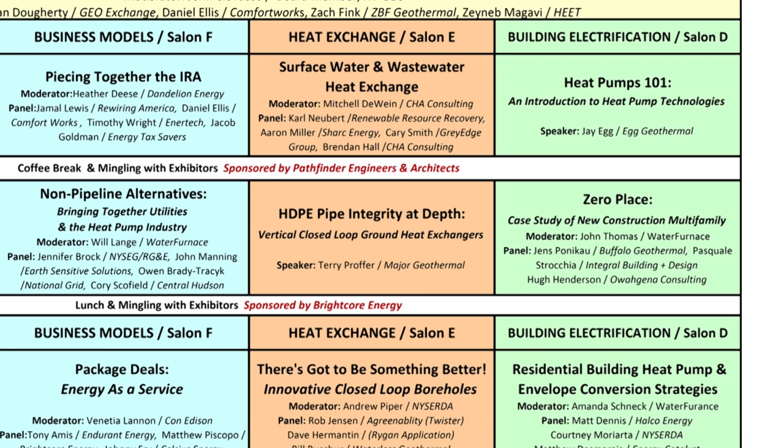So I would like to bring up Donovan Gordon and have him give us some introductory remarks for the day.

So Donovan, when did you start? 2015. Wow, and he had almost no gray, and I had a full head of hair at the time. Well, I still do, I guess.

When Donovan came to the organization, he was with NY-GEO, in the halls trying to advocate for geothermal, and then at some point this position opened up at NYSERDA, and he got it. He was the right man at the right time - somebody that really brought a background and an infusion of energy into this industry that we really needed, and he's carried that through. Now there's a lot of activity in the clean heating and cooling space, a lot of it happened under his guidance, and now he's looking at some other aspects he's looking to grow, and he's going to talk about some of those things today. So I'd like to bring up Donovan Gordon.

I didn't cry this time. No crying, I promised. Actually, Bill caught me earlier - allergies, so I've been a little teary-eyed. Yes, I didn't have much gray. Also didn't have any grandchildren when I started. Now I have 6. My goodness.

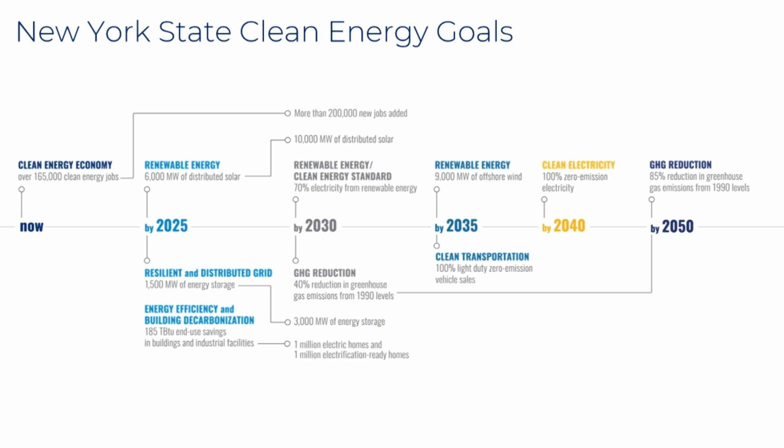Here are the sectors that we really need to address: buildings and transportation. So we're going to focus on the building sector.

Yeah, there's a lot of people from out of town as well, so they're less familiar with the state's goals too. Good, okay, yeah, that's why I figured I'd do that.

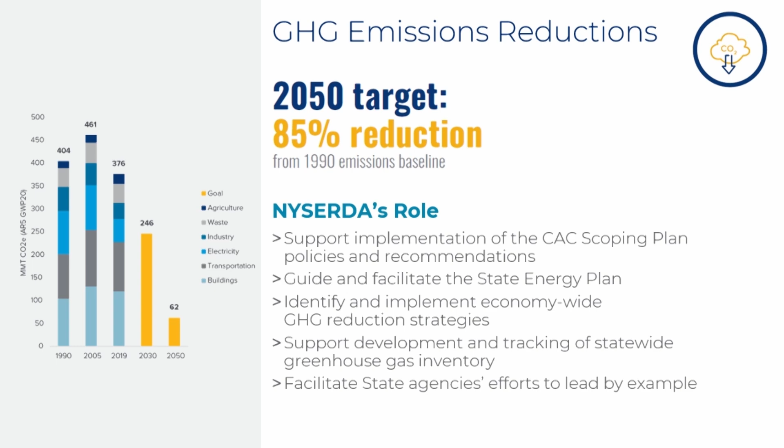While we put in heat pumps and do thermal energy networks, which is really infrastructure - my focus now is really on infrastructure, putting these network pipes in the ground - we still need building energy efficiency. So we need to tighten the envelopes. We need advanced codes and standards, and eliminating barriers. We kind of know what the barriers are: the cost, the training, and so on and so forth.

Now to the point I really want to get to: clean thermal energy networks and an update on the PON. Most of us probably know what it is, so I'm not going to spend time here. It's a network of piping loops. It could be a central plant or distributed with an ambient loop. We call it fourth or fifth generation, but it's really centralized or distributed.

We want it connected to on-site renewables, and resiliency is going to be the big thing. The biggest fear we hear from customers is: if power goes out, I'm not going to have heat, so don't take away my gas - because when we had these storms up in Western New York, people were opening their ovens to stay warm. We don't want that. We need to make sure their heat pumps stay on and they stay warm. I think that's our responsibility. If we're selling them this product, let's make sure it's reliable and they can count on it when they really need it.

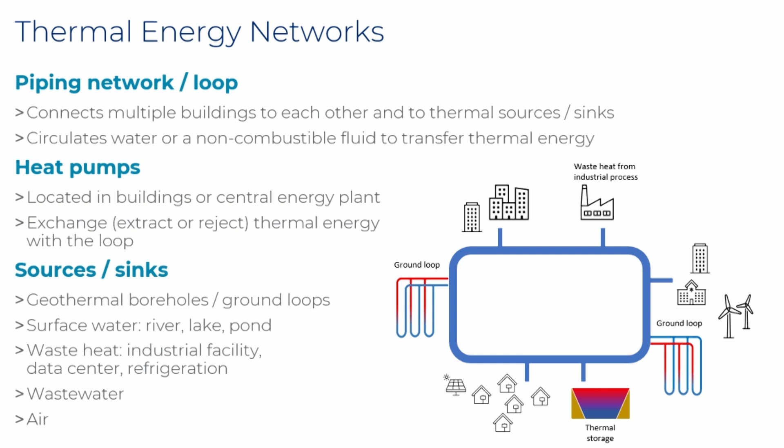They're looking at different sources and sinks, loops - that's what we're here for - ground loops, surface water, lakes, ponds, wastewater, industrial refrigerants, waste heat, heat coming from building to building, and air source. We want to use every available thermal resource to heat and cool and provide hot water to buildings. No heat should escape - let's take it and reuse it. That's all the heat pump does, right? Transfer heat from one place to another. Let's utilize it to the max.

This now is sort of an update on PON 4614. It was launched in February of 2021, and it was a pilot project. We didn't really know what to expect here, and it's performed far beyond our wildest expectations, to the point where we actually had to drop a couple of the categories just to keep the funding to where we can help it advance.

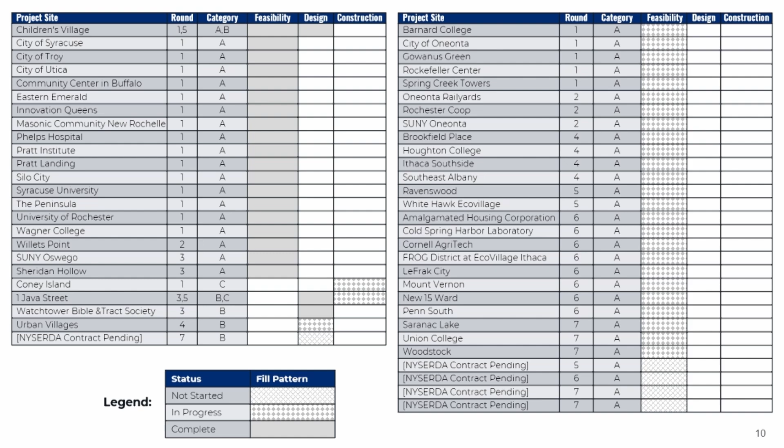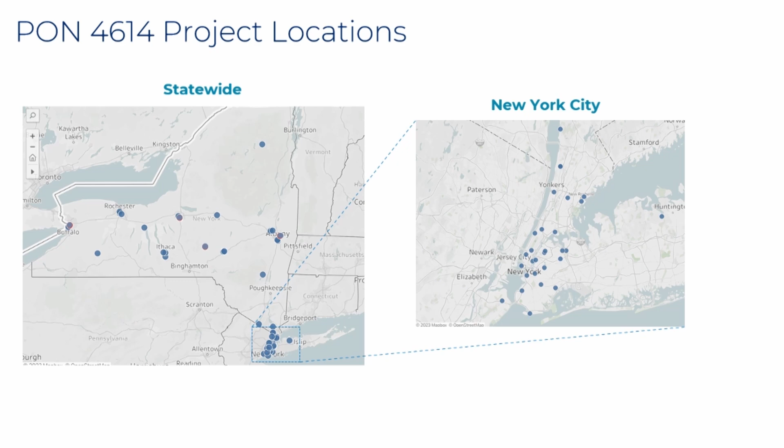So what I'm going to do next is really give you some highlights of some of the projects in there to let you see the diversity, the breadth, and the depth of the projects that have come to us. Now, these aren't NYSERDA projects—these are proposals that were submitted to the PON and reviewed by an independent scoring committee and deemed worthy of funding. So while we say this is a NYSERDA program, this is the industry bringing projects to us to help them scope it out.

So I'll start off with the first one, Mount Vernon. This is a feasibility study that's about to be started, up in Westchester, about 600 plus thousand square feet. I start off with this one because, as I mentioned, we have 53 projects in our queue right now.

This is the only project of the 53 that lists a MWBE as a partner. So we really need to do a lot better in terms of inclusion, making sure we have as broad a representation in this business as possible, not only training and installing, but actually being partners and subcontractors. So congratulations to the team in Mount Vernon.

Spring Creek Towers, halfway through the feasibility study, I believe. This is very, very interesting, I love this one. Spring Creek Towers is, I believe, one of the largest, if not the largest, affordable housing complexes in the country.

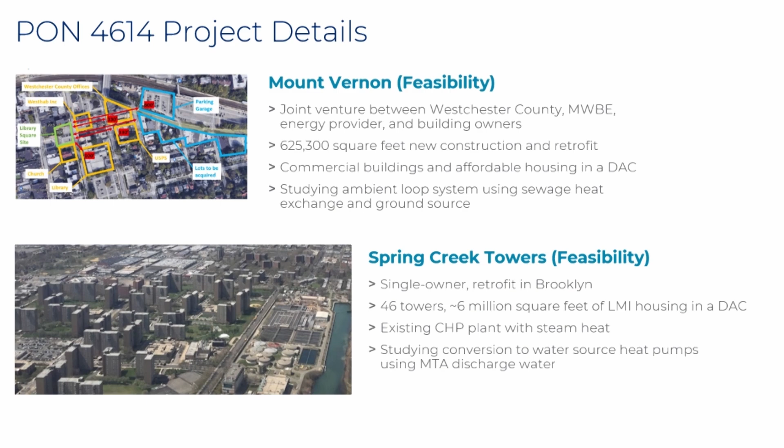So awesome, now I've got to go in turbo drive here. Saranac Lake, what's beautiful about this one? North Country, they want to be municipally owned. But this particular community does not have access to gas, so we're taking them straight to thermal energy networks, which is beautiful. We want to do that.

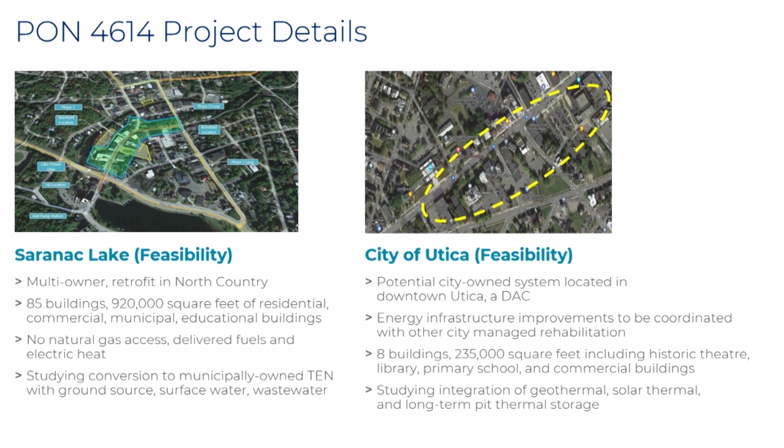City of Utica, their downtown area, a disadvantaged community, another study we're doing where the municipality wants to own the system. So there's a common theme here: we've got a bunch of municipalities really looking at doing thermal energy networks, and I'm encouraging public-private partnerships, like what's happening in Troy with National Grid.

Rochester District Heating Cooperative, this is a steam cooperative. We've got a steam utility that is now looking to convert their steam plant to provide a thermal energy network with geothermal boreholes and wastewater. The Children's Village, they're in the design phase. Actually, they just finished their design, as a matter of fact.

It's a 180-acre site that provides services for children between the ages of 6 and 20 who've gone through the foster home system, to help them become functional citizens. So it really is a rehabilitation, a wonderful cause, and it's a non-for-profit. So we look forward to this, and they're on 100% oil.

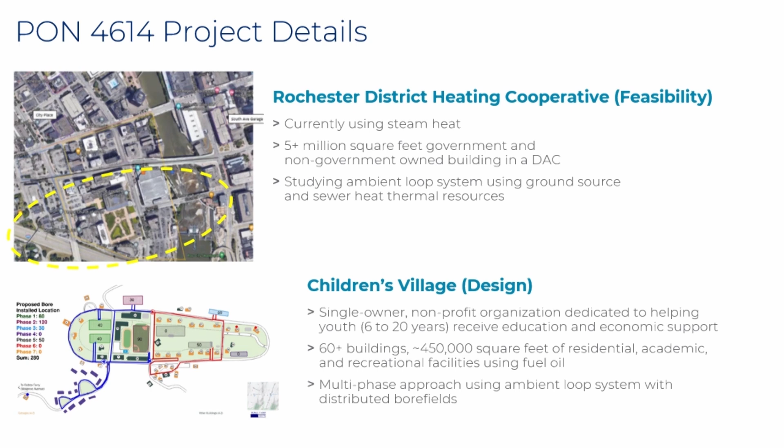This is a community a couple miles away here in Albany. It's 100+ buildings, but this is mostly single family and a few multifamily area. They're looking at boreholes and I think some wastewater too, or part of it, but solar and on-site renewables and storage - this is the whole package they're looking to put together on that one.

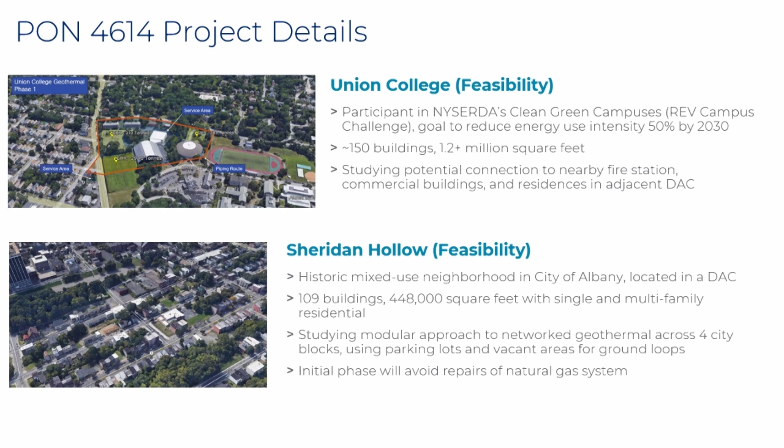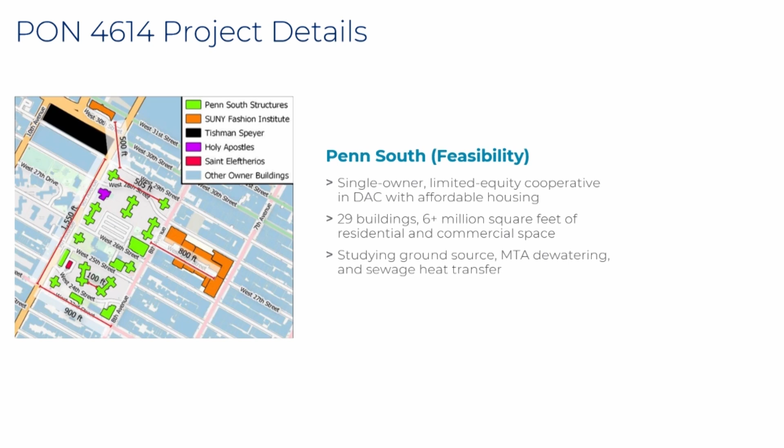And another good one, right in the heart of Manhattan, Penn South. This is in the feasibility stage. Another 6 million square feet plus, and it is in a disadvantaged community and affordable housing. So you can see here, we've got some big projects targeting and impacting affordable housing and disadvantaged communities.

Observations so far? New construction and campuses are the lowest hanging fruits. Yep, as you can see, we got One Java, we've got Coney Island. Yes, they're going to go out first, and as you see the studies we're now doing is small cities and big apartment complexes, the retrofits.

We got to solve the retrofit problem. The other thing is, looking at building envelopes, we got to upgrade the buildings, the electrical upgrades that are needed. So these are all things that need to be factored in, different business models.

Most common sources so far in these studies are geothermal and wastewater. I'm not even getting to the 500-foot stuff - I know they're working on that. And one big thing is we need drillers. I think that's sort of a common theme.

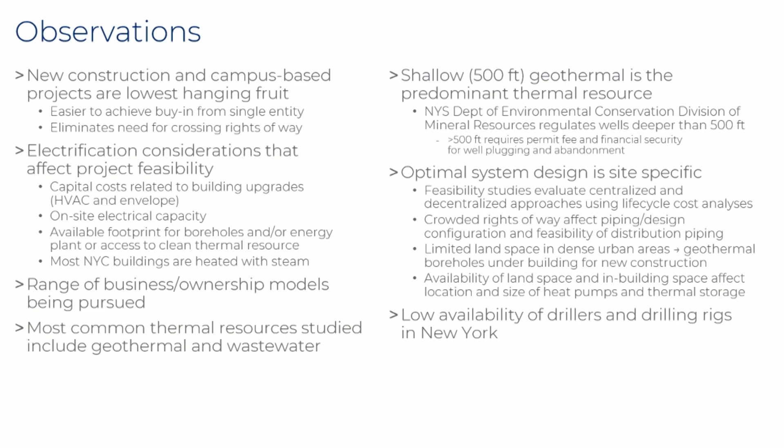Looking ahead. Don't look too far ahead. Don't look too far ahead? No, you're doing good. Okay, all right.

Well, we talked about the scoping plan. Chapter 12, section B6 has a whole section on support development of thermal energy networks. You can read that. Well, I love this one in chapter 18 that no one really talks about, gas system transition. And we lifted this directly from the scoping plan: one scenario that should be considered is seeking to move whole streets and neighborhoods at a time from gas infrastructure to a community-based thermal energy network that supports heat pumps.

Love it. And as we talked about, the Utility Thermal Energy Network and Jobs Act that was passed last year, allowing utilities to now own and operate thermal energy networks. And in the next couple months, I assume, DPS will be naming the projects, the pilot projects that they've approved from the utilities.

We're doing a lot of outreach. I'm not going to spend a lot of time here. We have a lot of stuff on our website. We're working internally with departments, externally with other agencies. We're working with strategic partnerships.

I do want to say one thing in additional focus. I think Christine mentioned it last night, but NYSERDA has entered into a multi-year contract with New York-GEO to help them build the organization, to grow their membership, and to basically serve you much better going into forward. So we're now joined at the hip to a certain degree.